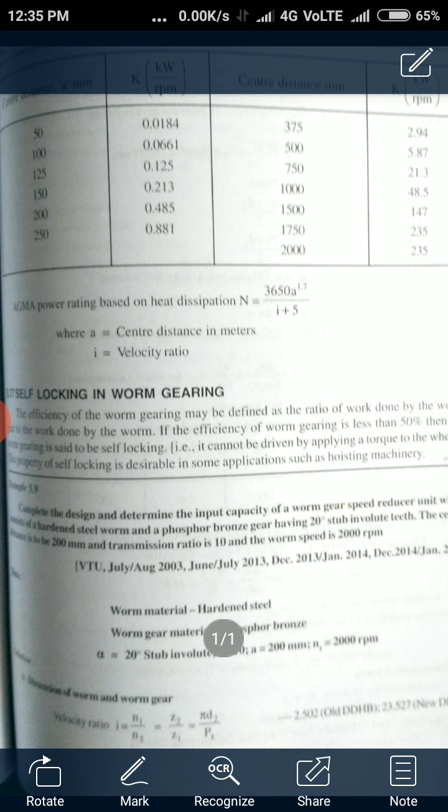Complete the design and determine the input capacity of worm gear, that is a follower worm gear speed reducer unit, which is made of hardened steel. The material for a worm gear, the follower, made of hardened steel worm and phosphor bronze gear having 20-degree stub involute teeth. The center distance is to be 200 mm and the transmission ratio is 10, and the worm speed is 2000 rpm.

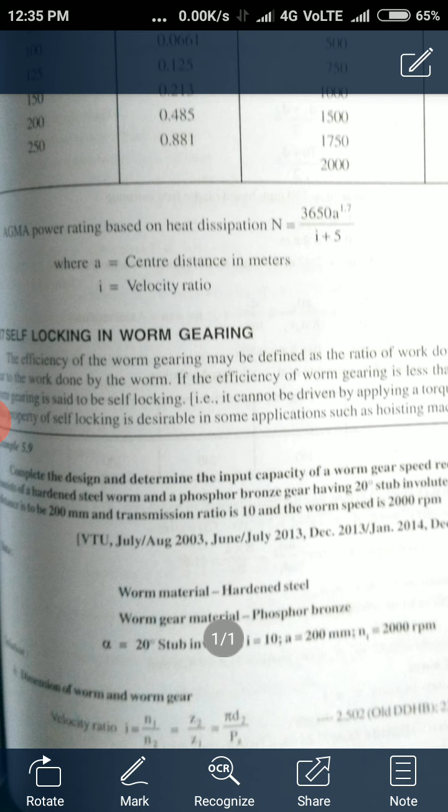So what is given in the data? The material for worm is hardened steel. The material for worm gear is phosphor bronze. Pressure angle is 20-degree stub involute.

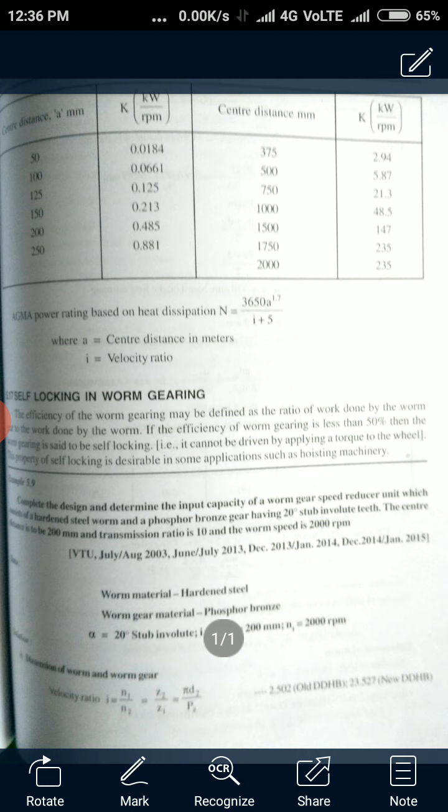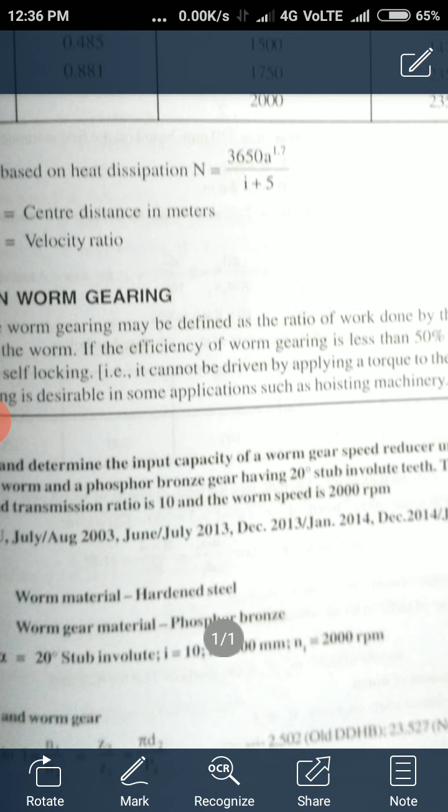The velocity ratio or gear ratio is 10. The center distance A is 200 mm, and the speed of the worm gear is N2. The worm speed, N1, is given as 2000 rpm.

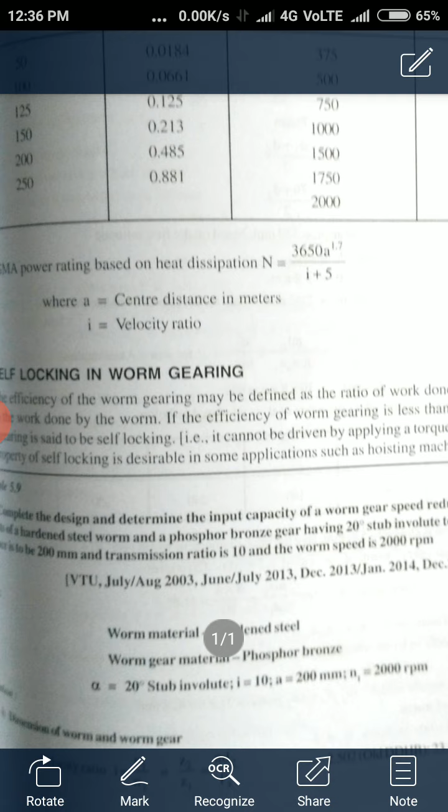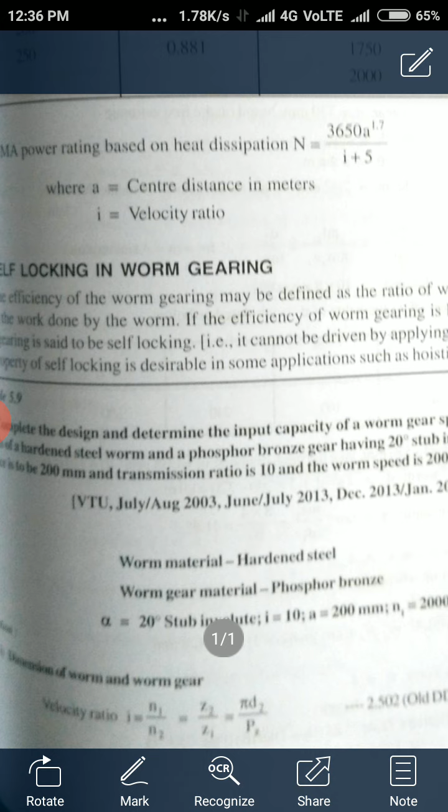Following the same procedure as for design of spur gear, we'll determine the speed of the worm and worm gear. We know the speed of the worm, so we can determine the speed of the worm gear using the velocity ratio, from the equation 23.527: I equal to N1 by N2, that is equal to Z2 by Z1.

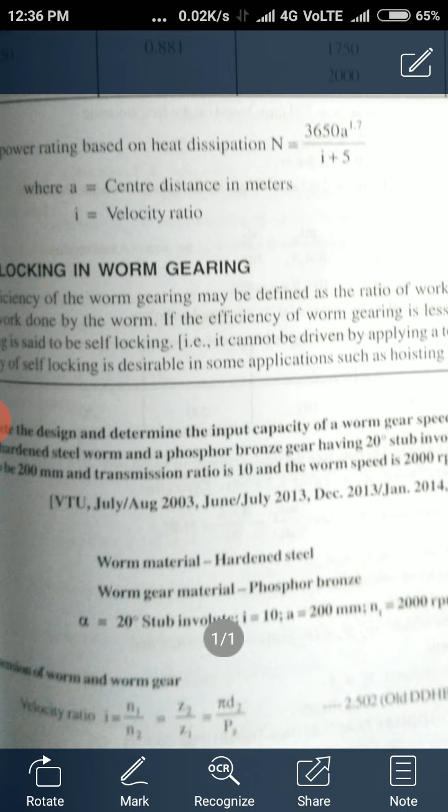Substituting the N1 value, we can determine the speed of the worm gear or the follower. We get N2 equal to N1 by I, that is 2000 by 10, which is 200 rpm. Now step 2.

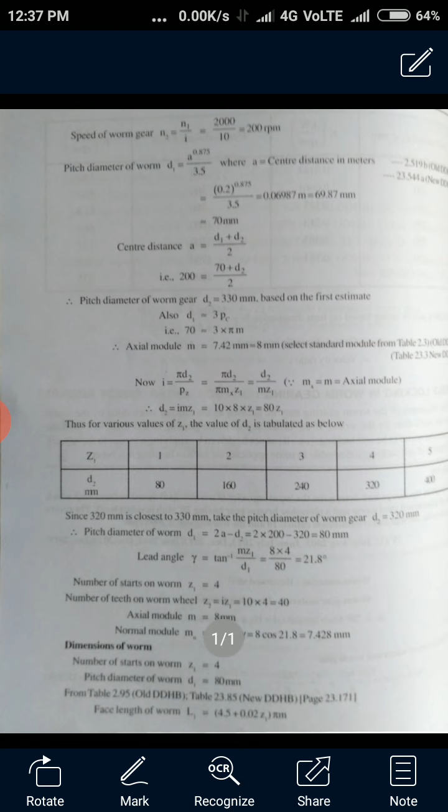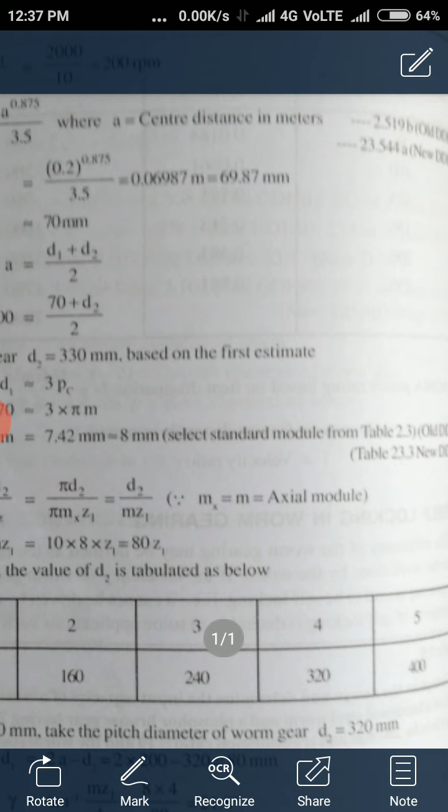In step 2 we will determine the diameters of worm and worm gear by trial basis. The diameter of worm D1 is given by equation 23.544a, which is D1 equal to A raised to 0.875 divided by 3.5, where A is the center distance in meters.

Substitute the center distance given in mm as 200 mm. In meters, that is 0.2 meter. So 0.2 raised to 0.875 divided by 3.5. We get 0.06987 meter, that is 69.87 mm in terms of mm. Rounding off, we can take 70 mm.

Using the center distance, we can determine the diameter of the worm gear, the follower. That is A equal to D1 plus D2 divided by 2. Substituting, 200 equals D1, which is 70 mm, plus D2, divided by 2. We get the diameter of worm gear as 330 mm.

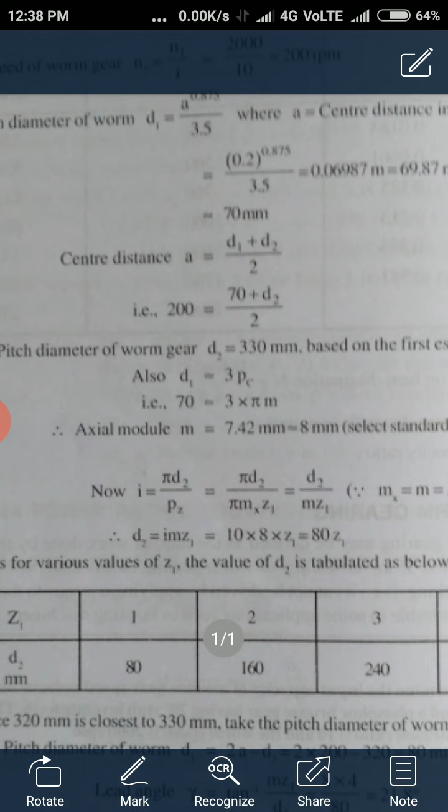As I said, the diameters D1 and D2 will be determined by trial basis here. So take D2 equal to 330 mm. That is D1, D2 based on the first trial.

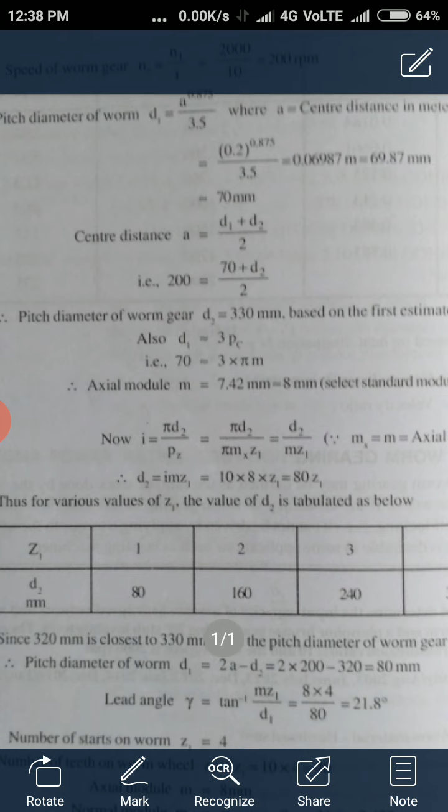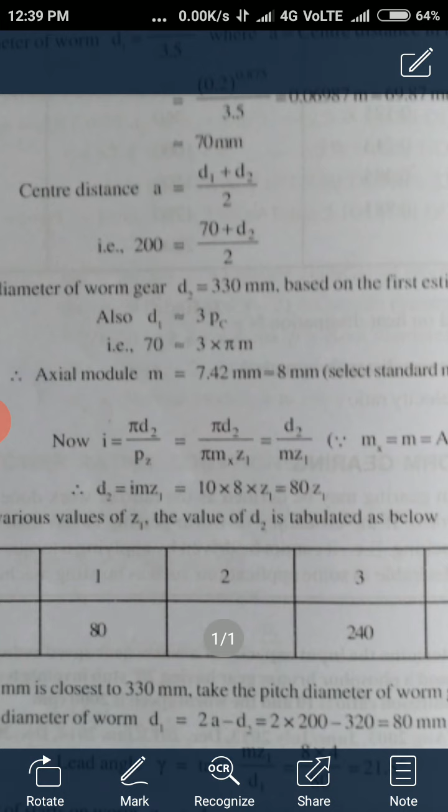Next, in trial 2, diameter of worm is also given by the relation D1 equal to 3 into pc, where pc is circular pitch. Substituting the D1 already found, 70 equal to 3 pi into m. The axial module m we get here is 7.42. The standard module from table 23.3 is 8 mm.

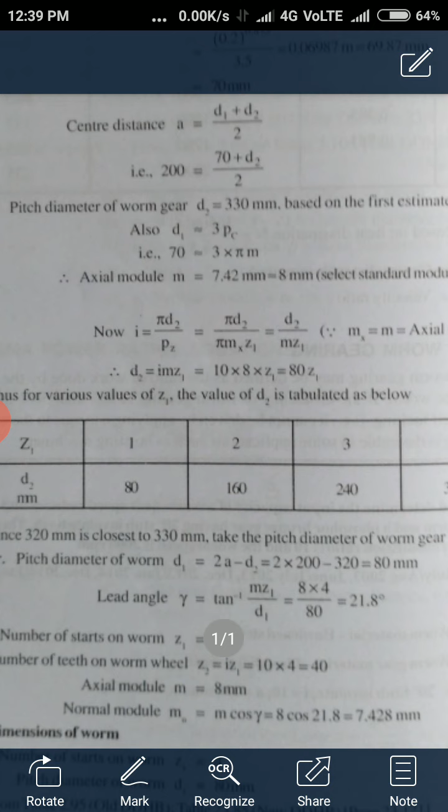Next, one more relation to determine diameter D2, that is I equal to D2 by m into Z1. See the last relation, okay?

Or you can say I equal to pi d2 by pz, that is equal to pi d2 by pi m z1, that is equal to d2 by m z1. Just remember I equal to d2 by m z1. So d2 we can write in terms of I, m, z1.

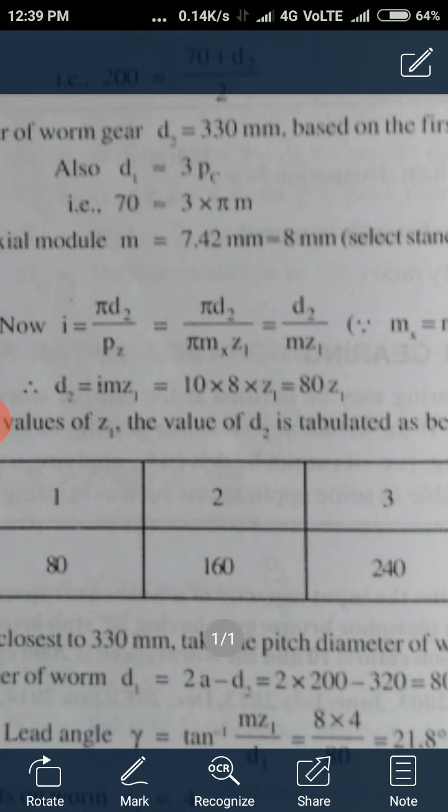Substitute there I value 10, m equal to 8, z1 we don't know, keep z1 as it is. So we have got 80 z1. Now using this table we can determine the diameters for various values of z1.

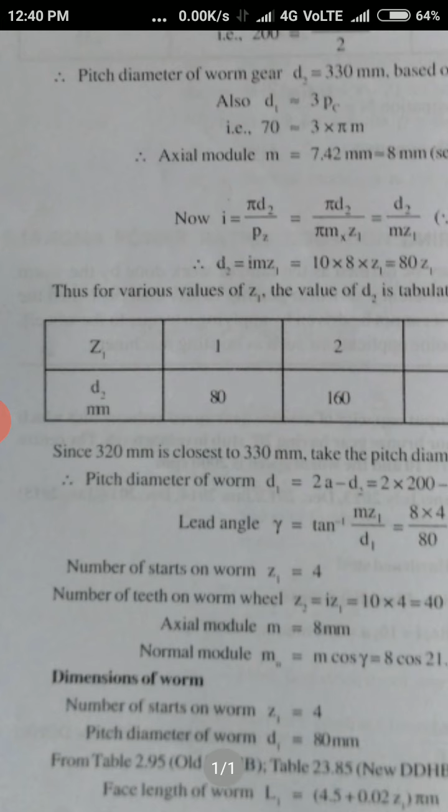So in the first column, first row it is z1, second row it is d2. As I said, the number of teeth on pinion or worm varied from 1 to 4 - so 1, 2, 3, 4. You can take it up to 5.

So using z1 equal to 1 and substituting in the above relation, d2 equal to 80 z1. So determine different values of d2: when z1 equal to 1, d2 is 80; when it is 2, 160; when it is 3, 240; when it is 4, 320; when it is 5, 400.

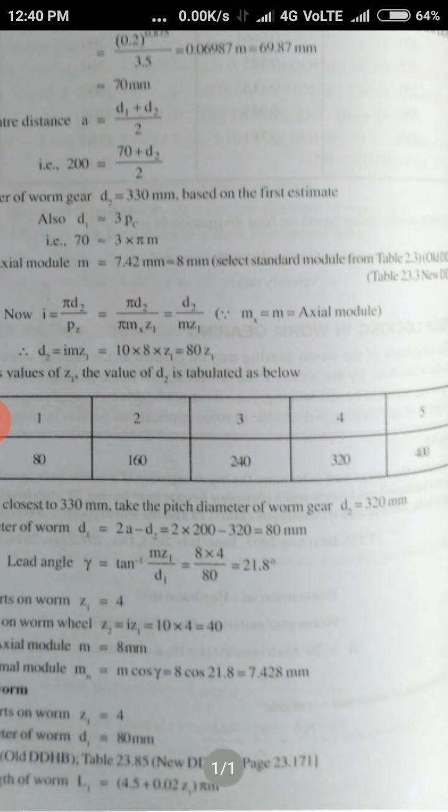Now we have to check the diameter value d2 to the nearest value we determined, 330 mm, based on the first trial. So d2 we got earlier in the first estimation was 330. In the second estimation, you have to see which value is nearest to this - that is 320.

When z1 equal to 4, d2 equal to 320. When z1 equal to 5, you got 400. Compared to 400, 320 is nearest to 330. So we can select d2 equal to 320, z1 equal to 4.

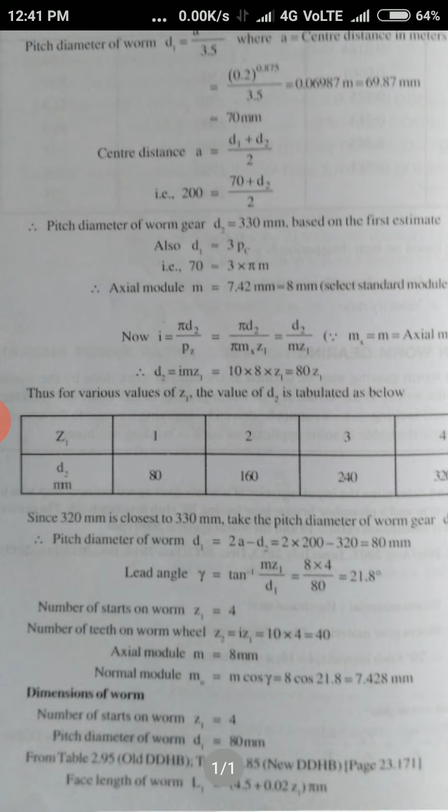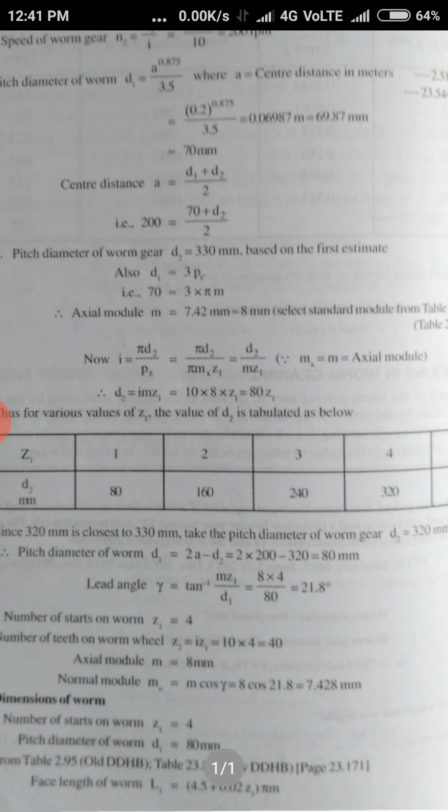Then we'll determine the correct number of teeth on pinion or worm, and also the correct diameter d1, using the center distance. So d1 equal to 2a minus d2, which gives 80 mm as d1.

Here you can see number of starts, meaning number of teeth on worm, z1 equal to 4, corresponding to 320. z2 using speed ratio I into z1, 10 into 4, gives 40. The axial module you got is 8 mm.

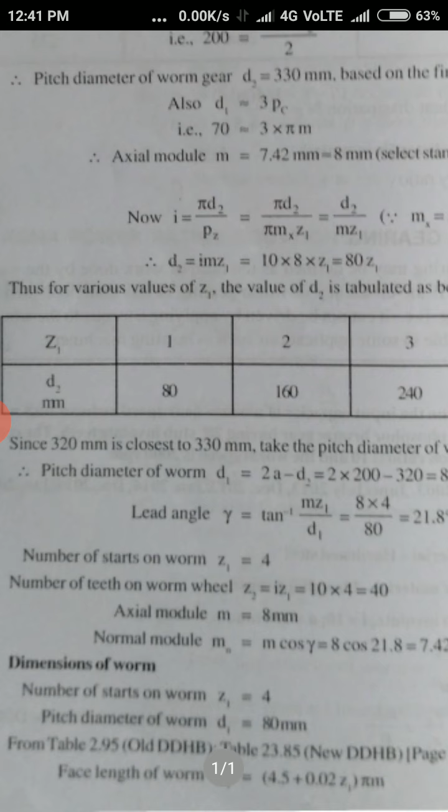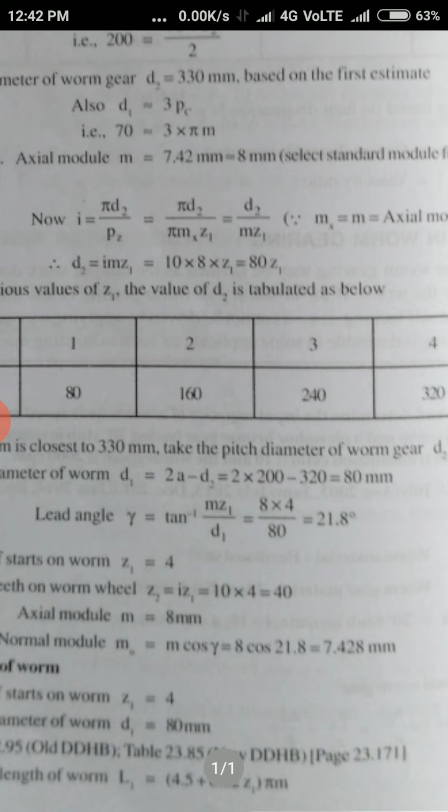One more term to determine is the lead angle, needed when you calculate efficiency in the later stage. That is lead angle equal to tan inverse of m z1 by d1. This formula is not in the data handbook, you have to remember this. So tan inverse of m z1 by d1: m is 8, z1 is 4, d1 is 80. So how much angle do you get? 21.8 degrees. Now moving to step number 3.

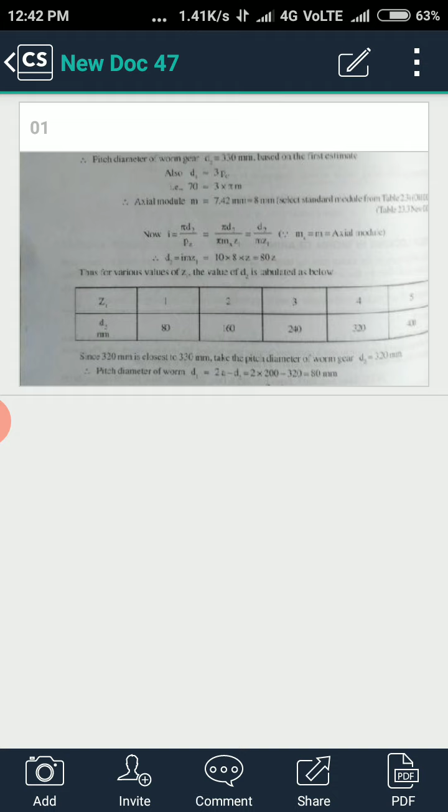Moving to step number 3. One thing you have to remember always here, when you determine the weaker member - when you design worm gears, always the worm gear is the weaker member compared to the worm. So by default worm gear is the weaker member.

So now we'll determine the power by Lewis equation, given by equation 23.567: ft2 equal to sigma 0 into mn into b into capital Y into cv. So sigma 0 is allowable stress, mn is normal module, b is face width, capital Y equal to, already discussed in bevel gear, pi into y, and cv is velocity factor.

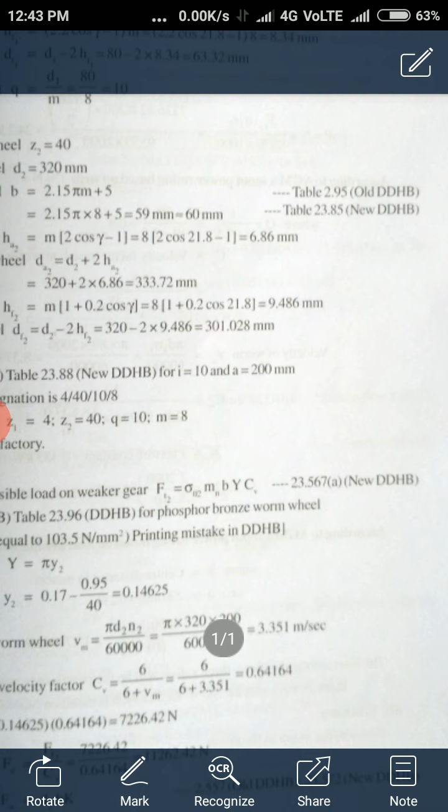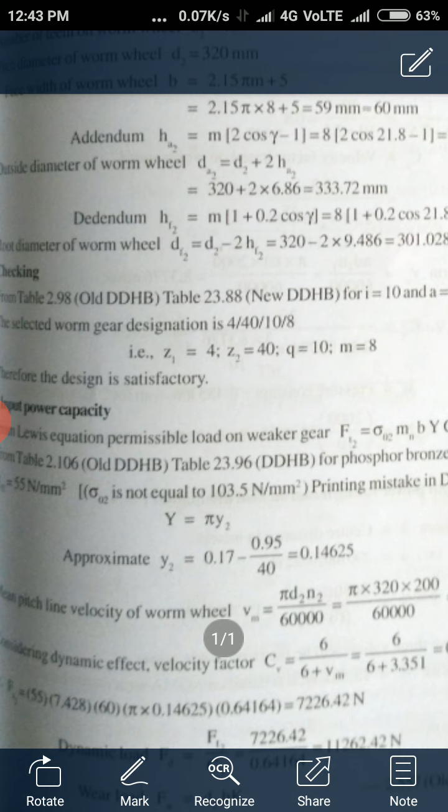The table for worm gear to determine the allowable stress is 23.96. For phosphor bronze worm wheel, we get sigma 0 equal to 55 Newton per mm square. But in the data handbook it is given as 103.5 Newton per mm square - that is not correct. The correct one is 55 MPa. So just note this down and try to remember, don't take the data handbook value which appears as 103.5 MPa.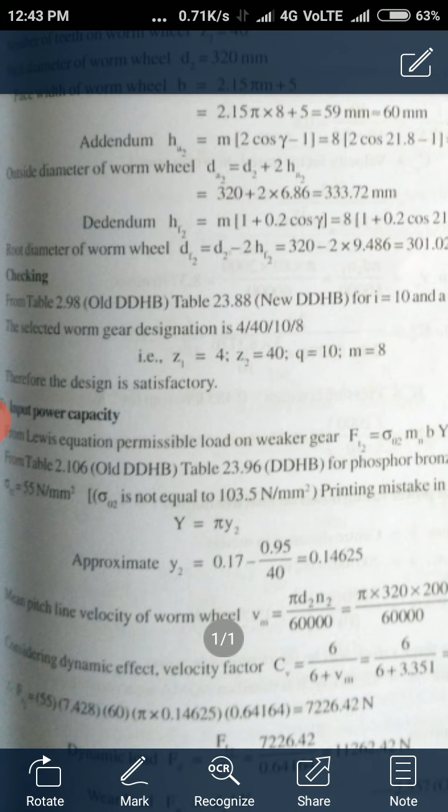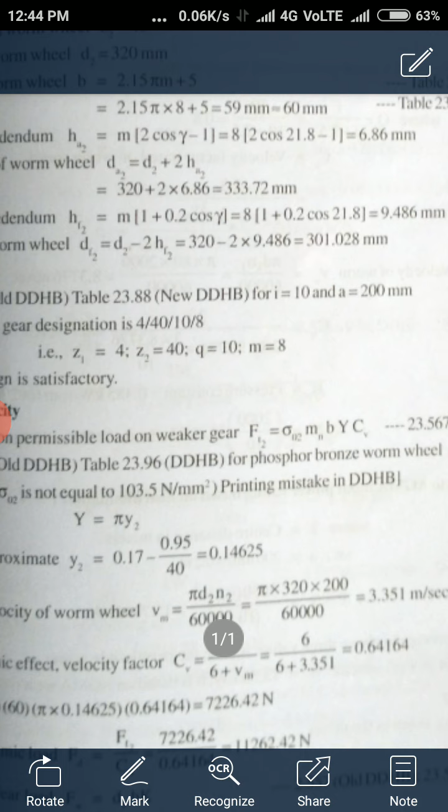Next, mn is normal module, we know that. B is face width, you have to assume as 10 m. Capital Y equal to pi into y2, pressure, Lewis form factor for 20 degree stub involute. So using the equation, 0.17 minus 0.95 by 40, that's equal to 0.14625.

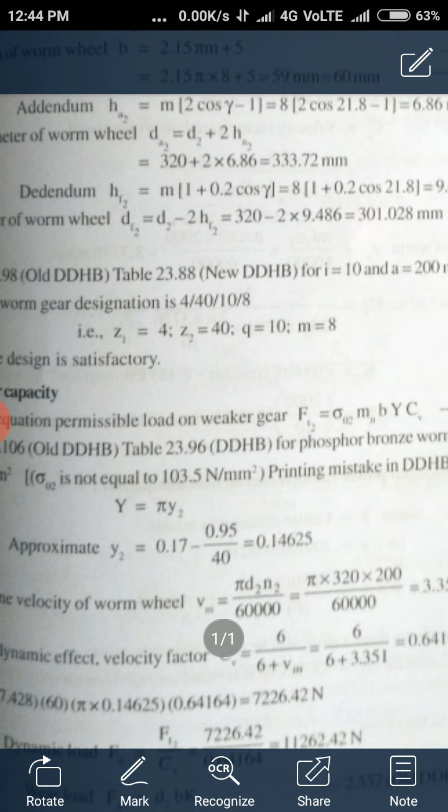Cv is velocity factor. Before that we'll determine the velocity of the weaker member: pi d2 n2 divided by 60,000. So pi d2 you know is 320 mm, n2 is 200 rpm.

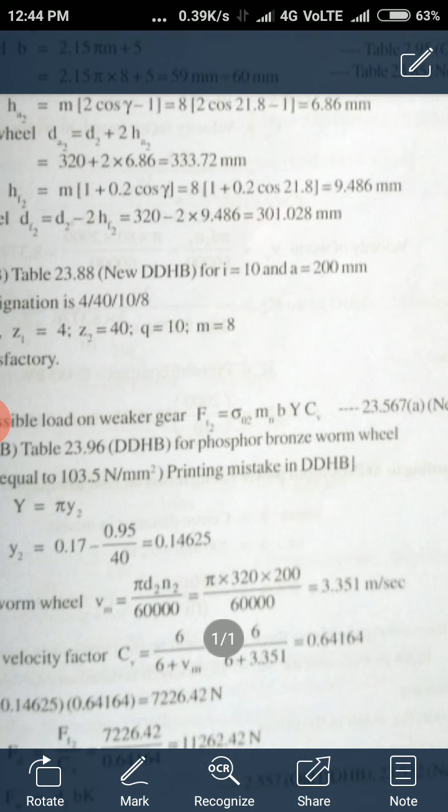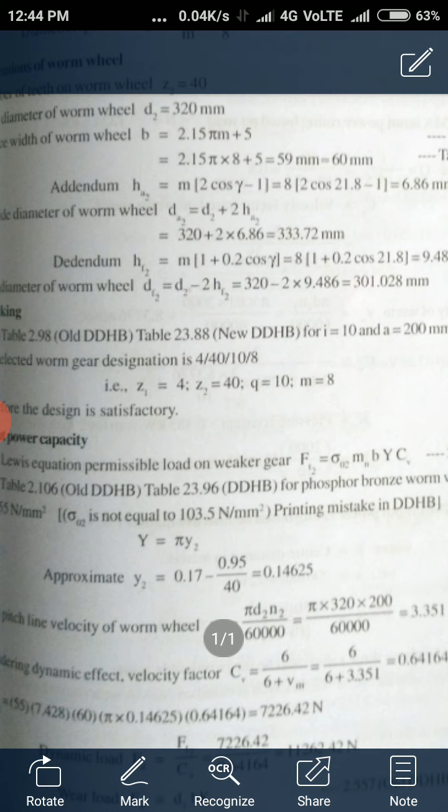So we got 3.35 meter per second. The velocity factor Cv equals 6 by 6 plus Vm. You have to remember this for a worm gear, you have to use only this equation. So 6 by 6 plus Vm is 3.35, so we got 0.64 as Cv.

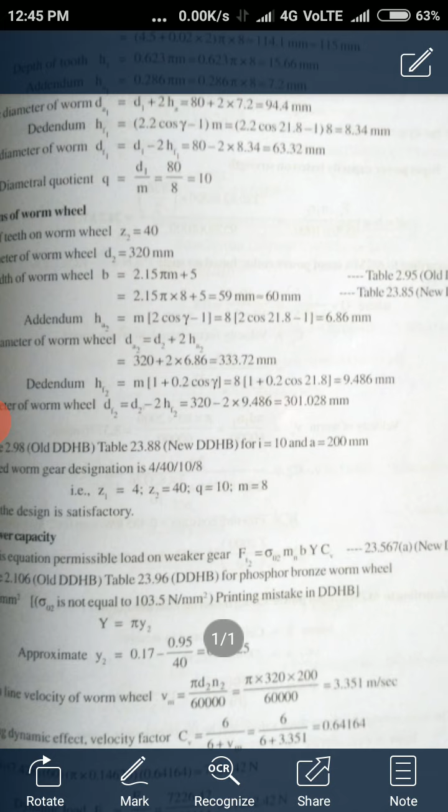Substituting all the values in the tangential tooth load by Lewis equation. That is 55 allowable stress, M is normal module 7.42 or 8mm also you can substitute, 60 is the face width... face width is not 10mm, sorry. Here the face width B can be determined from the above table, you see here.

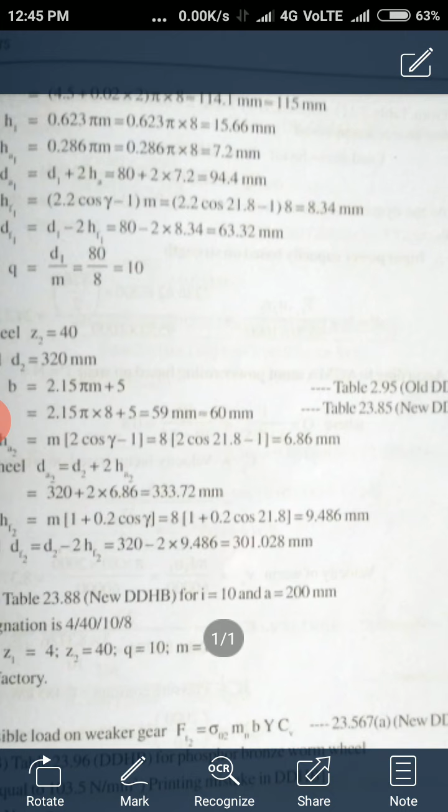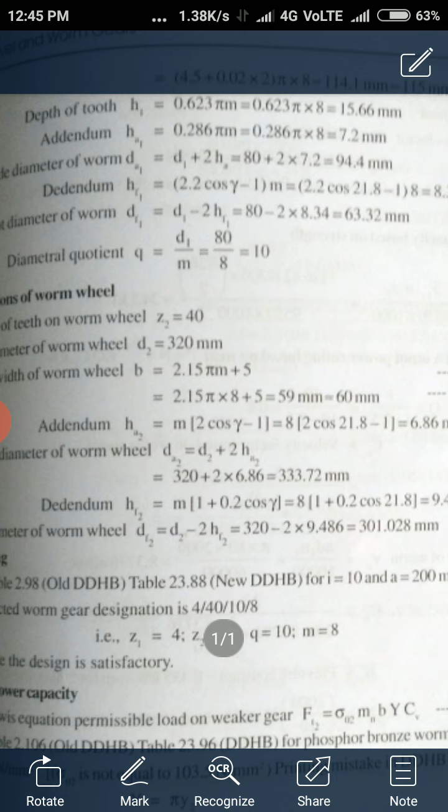Face width of a worm wheel B equals 2.15 pi m plus 5, from the table 23.85. So 2.15 pi into 8 plus 5, so you got 59mm, round off to 60mm. So 60, the face width, substitute the same in the tangential tooth load by Lewis equation.

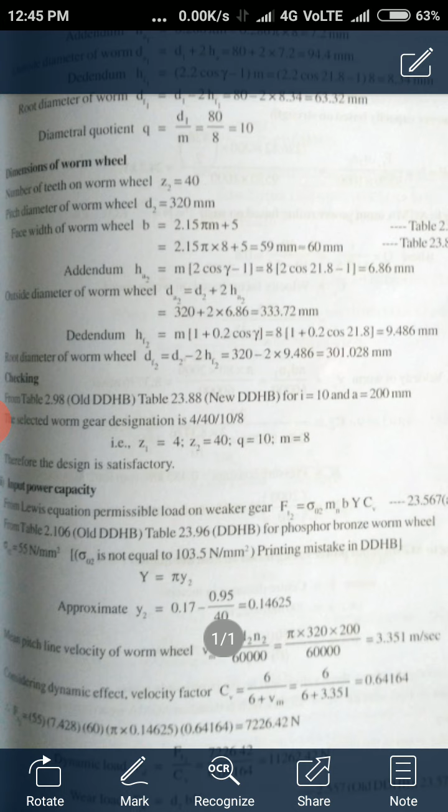60 into pi y2, y2 is 0.1462, into Cv velocity factor 0.64. How much you got? 7226.42 Newton. Then next step, dynamic load.

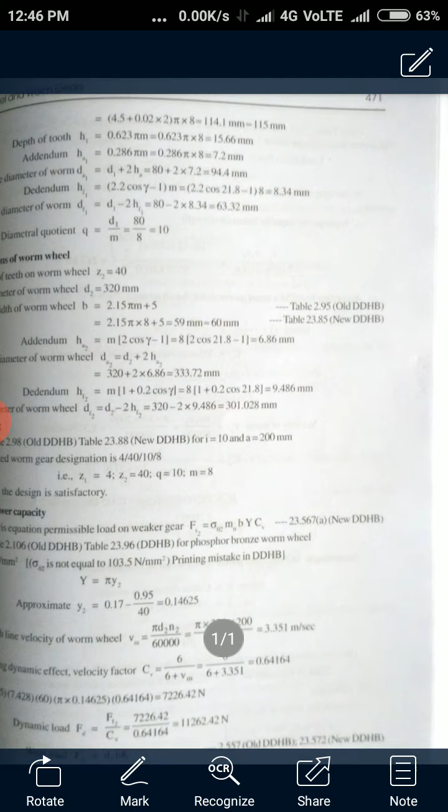It is given by Ft2 by Cv. You have to remember these relations because they are not in the data handbook. So Fd equals Ft2 by Cv, so 7226.42 by 0.64, so you got 11,262.42 Newton. Then wear load Fw equals d2 b k, from the equation 23.572.

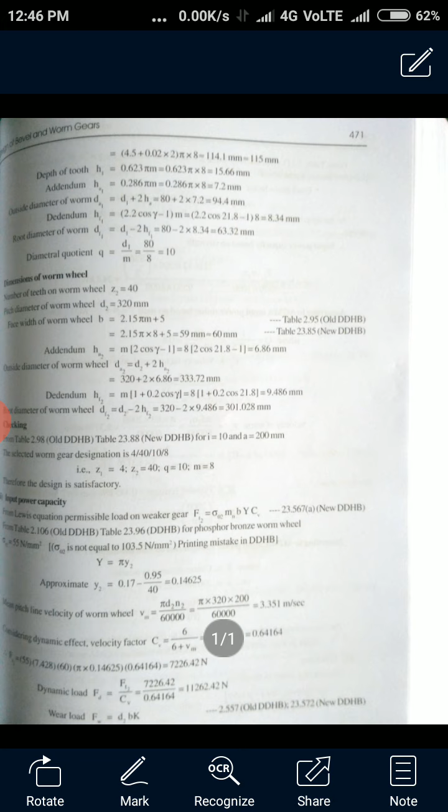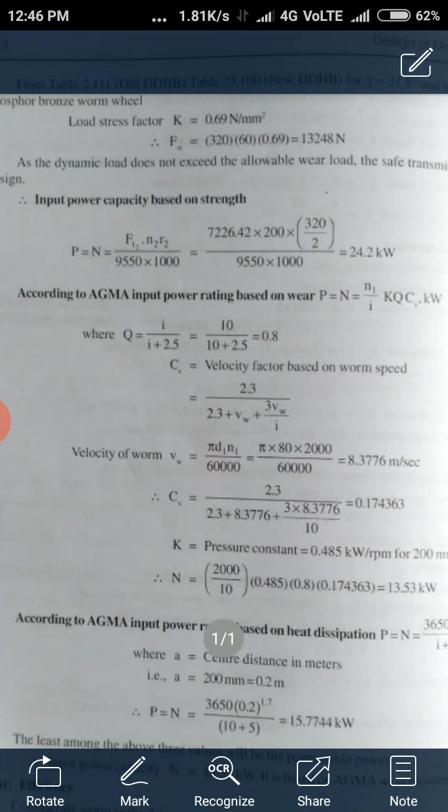So now here K is what, the load stress factor. So how we can determine the K value? Going to the table.

23.100 for lead angle, so lead angle we can calculate from here. So here you can see the lead angle formula, tan inverse of mz1 by d1. So 8 into 4 divided by 80, so you got 21.8 degree.

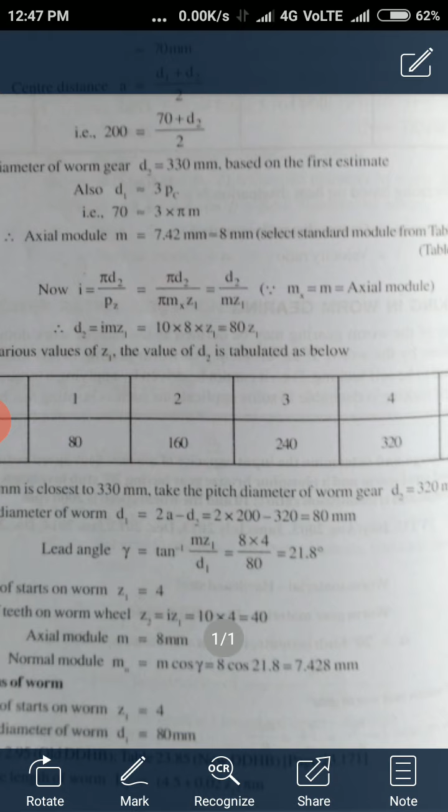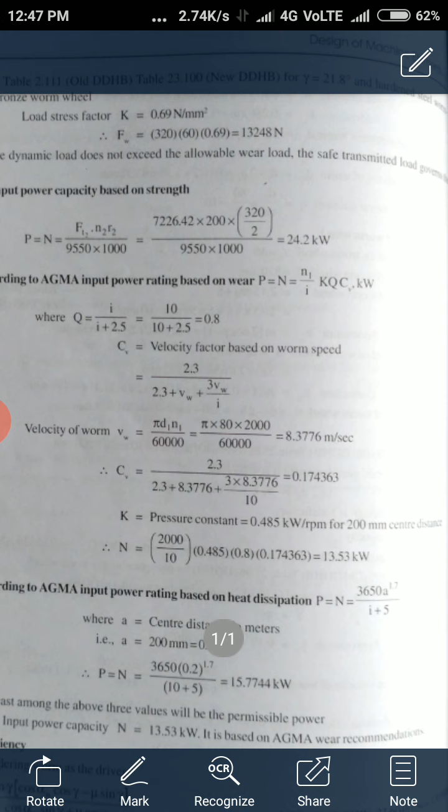So based on that, going to the table 23.100, for angle 21.8, for hardened steel worm and phosphor bronze worm wheel, so K value equals 0.69.

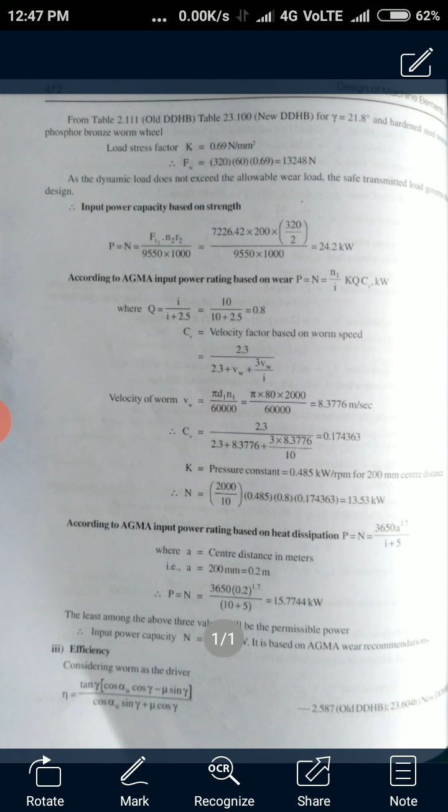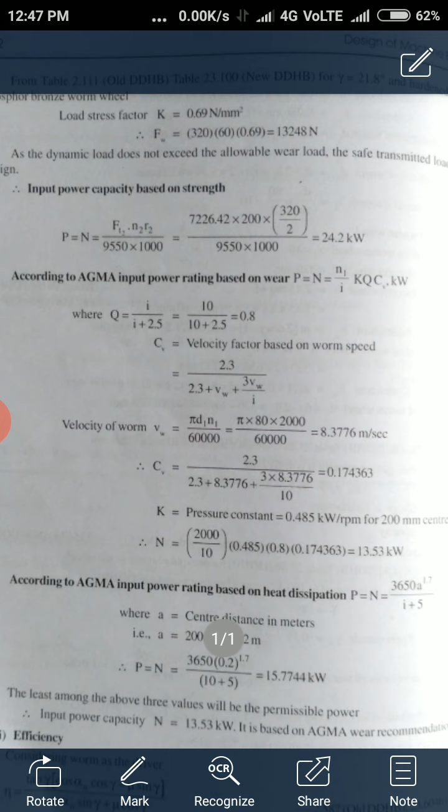So substitute the wear load equation, 320, d2 60, the face width, K is 0.69. You got 13,248 Newton. So you can see the dynamic load is lesser than the allowable, does not exceed the allowable wear load. The design is safe.

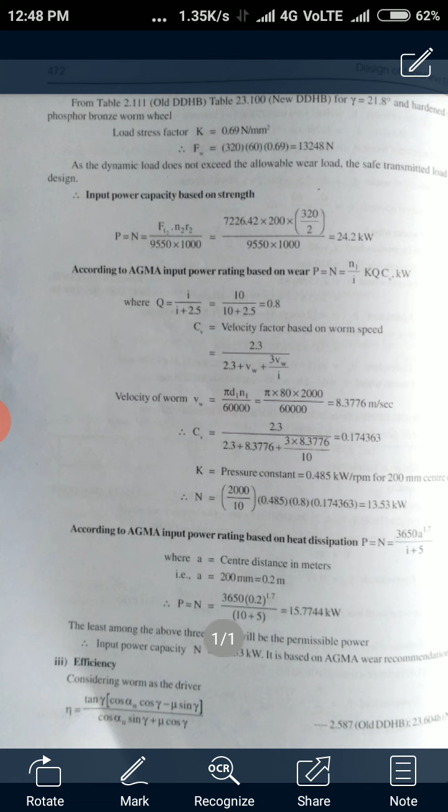Next step, so we determine the power based on 3 or 4 different criteria here. So the power based on the tangential tooth load, the power based on power rating, and the power based on heat dissipation. So three different powers we have to calculate, and among that the least power should be selected.

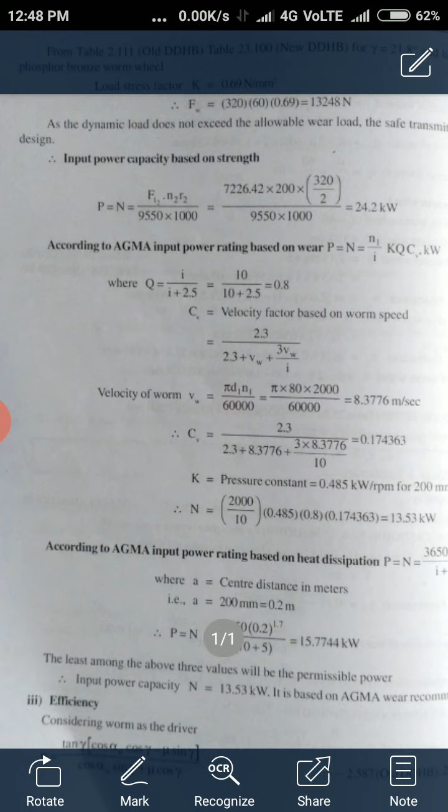So first one, power based on tangential tooth load. Already we know that when you design gears, ft equals 9550 by n r. So rewriting that, for a worm gear, n equals ft2 n2 r2 divided by 9550 into 1000. Ft2 already calculated, so substitute using that, we got 24.2 kilowatt.

Next, the power based on wear, so that is given by N equals N1 by I, K Q CV kilowatt. So these are the formulas not in the data book, these we have to by heart or remember. So where Q equals I by I plus 2.5. So I equals 10, velocity ratio 10 plus 2.5, so that is 0.8.

CV velocity factor based on worm speed. So worm velocity of the worm is given, pinion, worm is a pinion, so it is given by pi d1 n1 divided by 60,000. So that's equal to pi 80 into 2000 divided by 60,000, you got 8.37 meter per second.

So substitute that in CV, that is 2.3 divided by 2.3 plus VW, speed of the worm, plus 3 VW divided by I. So CV equals 2.3 divided by 2.3 plus 8.37, plus 3 into 8.37 divided by 10, so you got 0.1743. Then next K value, that is pressure constant.

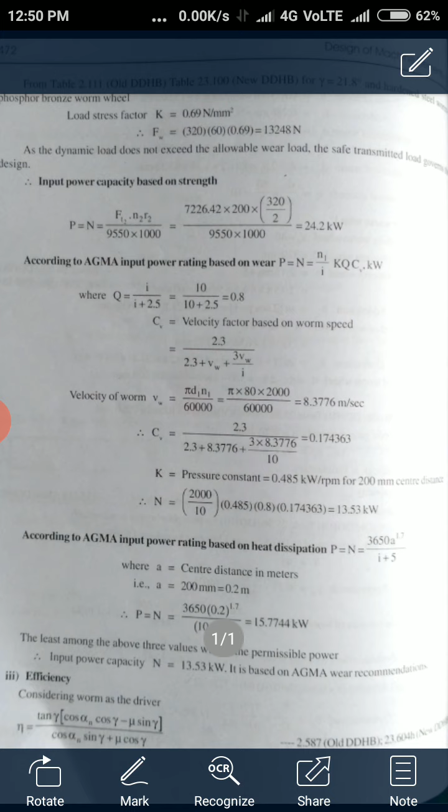So for 200mm center distance, you have to remember again this value, 0.485 kilowatt per rpm. Substitute these values in the power equation. N equals N1 by I, that is 2000 by 10, K 0.485, Q 0.8, CV 0.17, so you got 13.53 kilowatt. Next, the power based on heat dissipation.

So that is P equals N equals 3650 A raised to 1.7 divided by I plus 5. A should be in meters, so 200mm, that is 0.2 meter.

So 3650 into 0.2 raised to 1.7 divided by 10 plus 5. So you got 15.77 kilowatt.

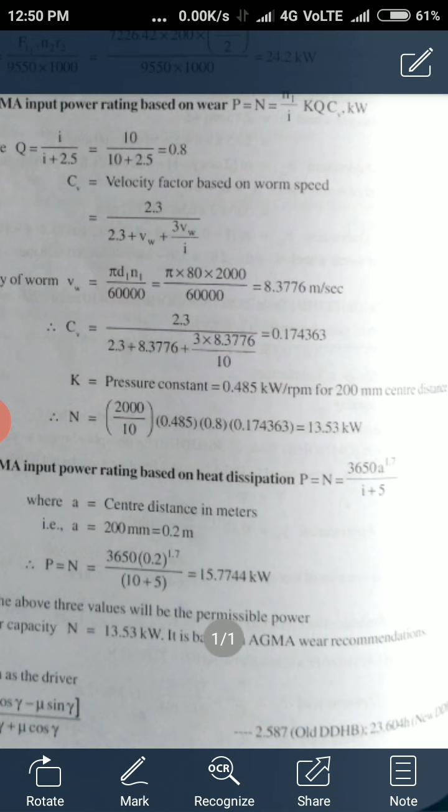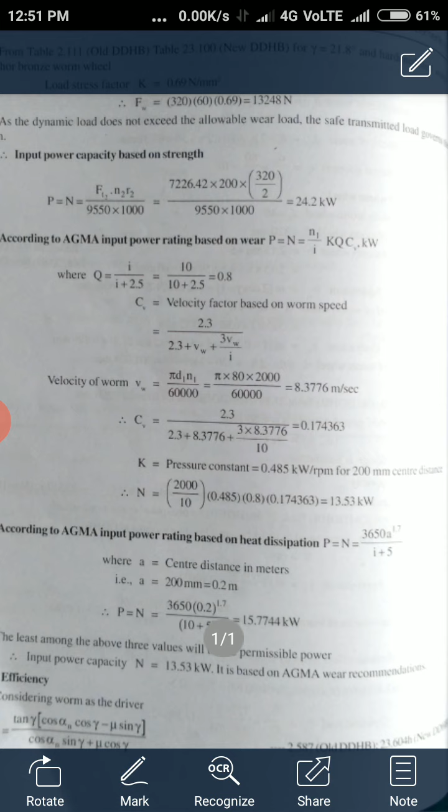Comparing all these: based on strength 24.2, based on wear it is 13.53, and based on heat dissipation it is 15.77. So the least one is 13.53 based on wear, so that should be selected for the design.

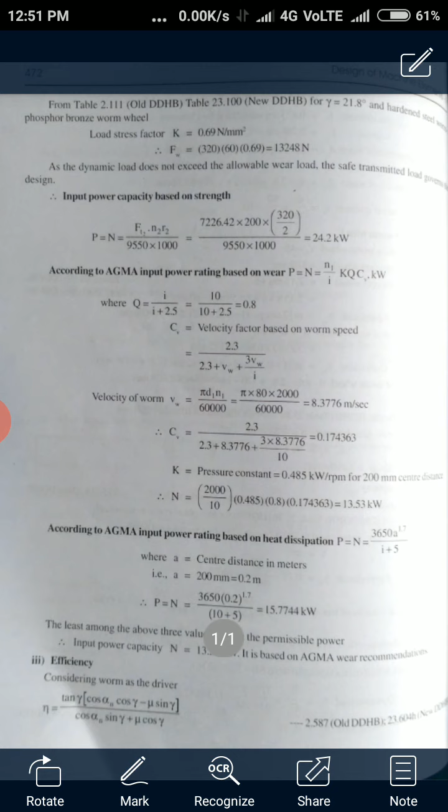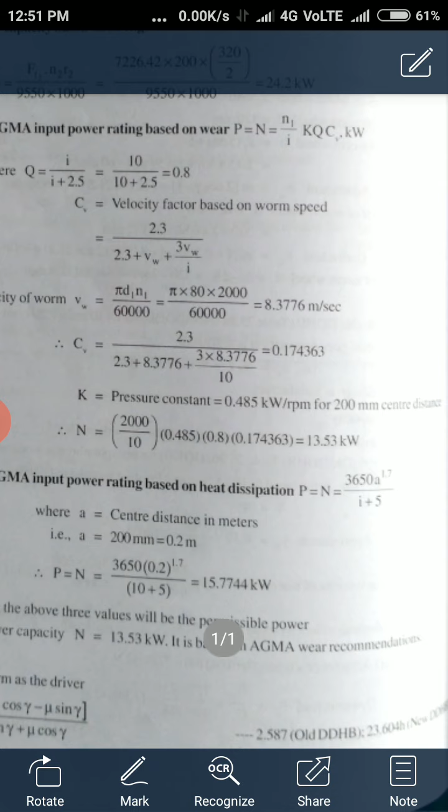Next, efficiency. Efficiency is given by the formula. This is one equation we have here, 23.604h. So one more equation is there that we can use, that one is you can see here.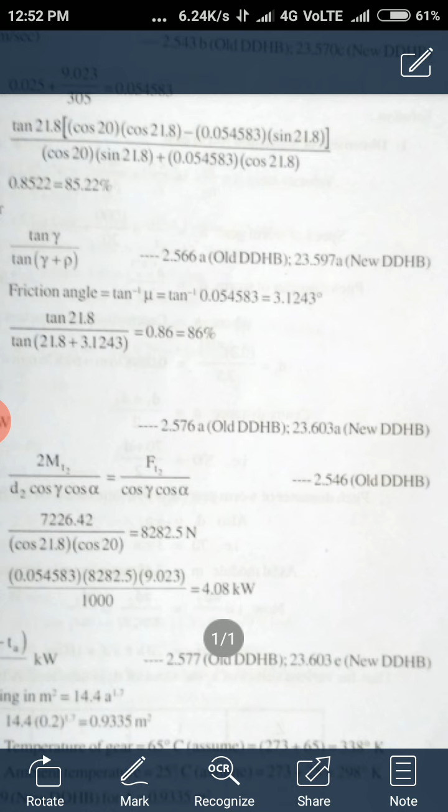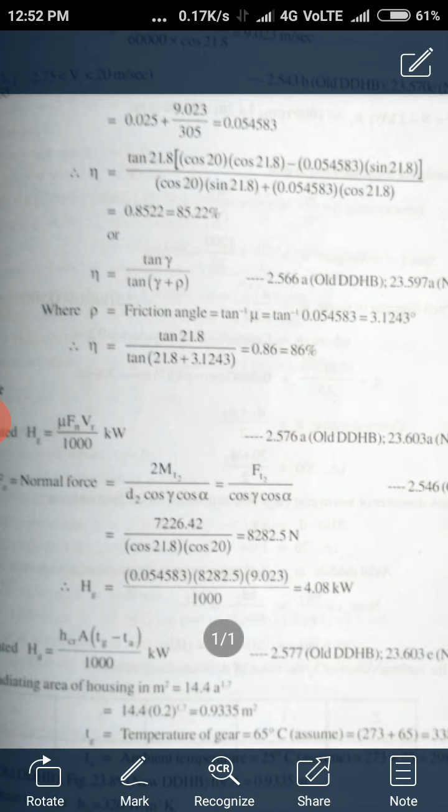You can see here the efficiency is equal to the equation 23.597a, that is efficiency equal to tan gamma divided by tan gamma plus rho, where rho is the friction angle, given by tan inverse of mu. So mu is the friction coefficient. How to calculate friction coefficient mu, you can see here.

That is based on the rubbing velocity, which is based again on the worm speed, given by equation 23.571a. That is equal to pi d1 n1 divided by 60,000 cos gamma. Substitute that: pi 80 2000 divided by 60,000 cos gamma, that is lead angle 21.8. So you got 9.023 meter per second.

This velocity is less than 20 meter per second, so the friction is given by equation 23.570c. That is 0.025 plus rubbing velocity Vr divided by 305. So how much you got here: mu equal to 0.025 plus 9.023 divided by 305. So you got 0.0545.

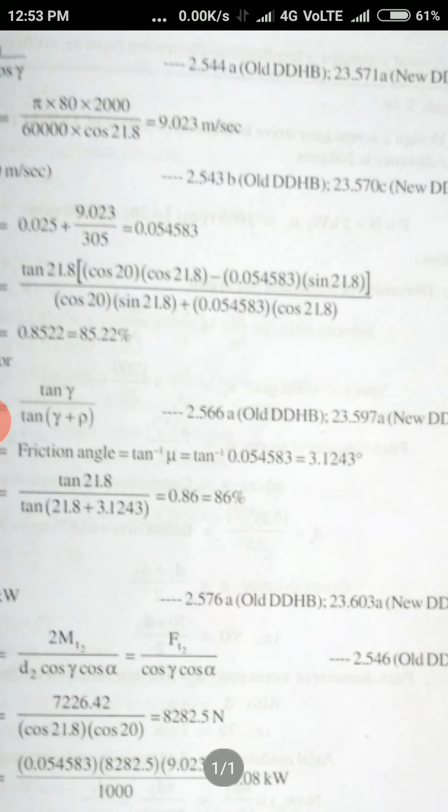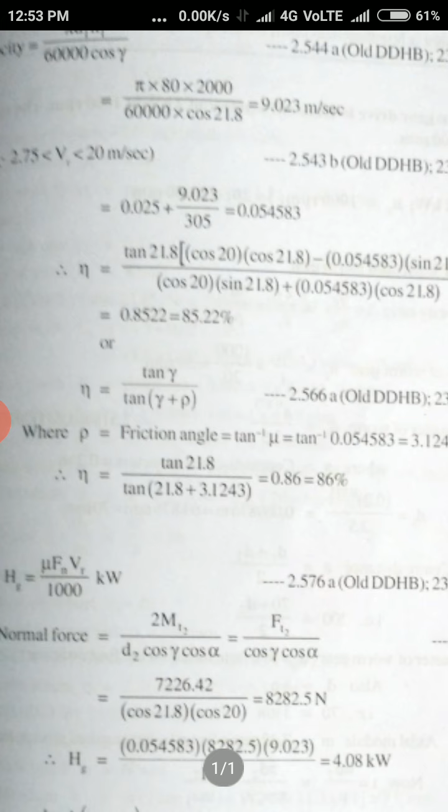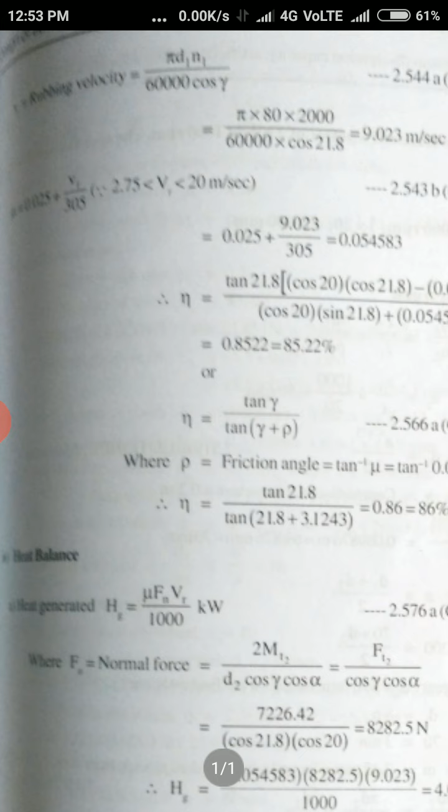Substitute here in the efficiency equation 23.597a. So efficiency equal to tan of 21.8 divided by tan of 21.8 plus 3.12, that is the friction angle. So how much efficiency got? 86%.

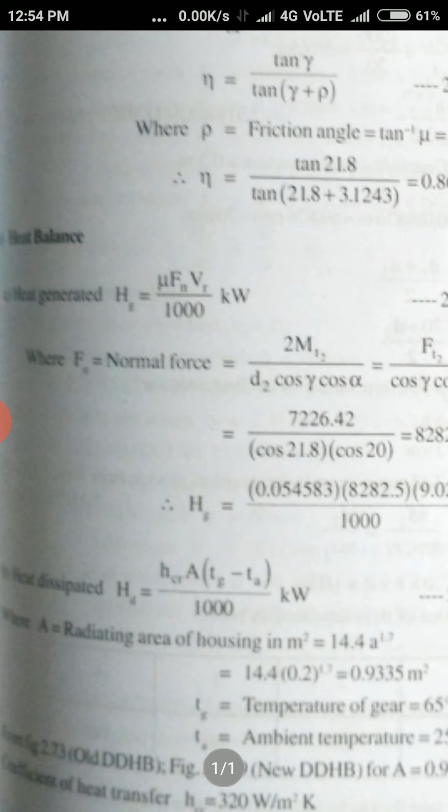Now last two parameters, heat generated and heat dissipated. The heat generated is given by Hg equal to mu Fn Vr by 1000. Here Fn is the normal force. Again these equations are in DDHB, you have to remember.

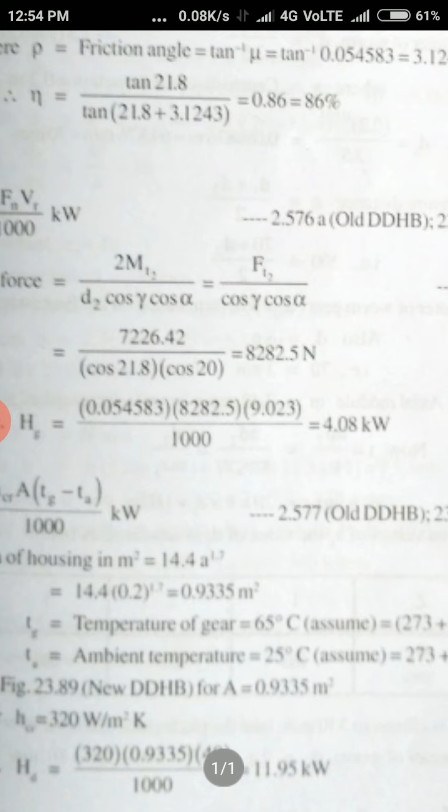Fn equal to Ft2 divided by cos gamma cos alpha. Substituting that: 7226.42 divided by cos gamma 21.8, cos alpha 20 degrees. So you got 8282. Heat generated equation is 23.603a: mu Fn Vr by 1000. So mu 0.05, Fn 8282.5, Vr 9.02 divided by 1000. So you got 4.08 kilowatt heat generated.

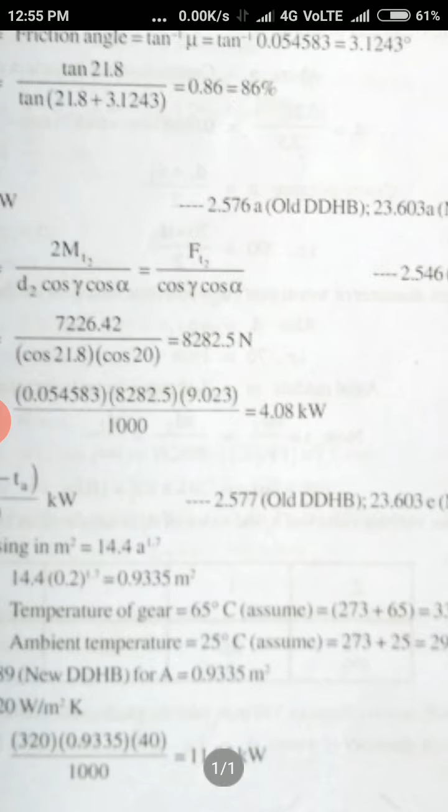Heat dissipated is given by equation 23.603c: Hd equal to hcr A into bracket Tg minus Ta divided by 1000 kilowatt, where A is the radiating area of housing in meter square, given by 14.4 A raised to 1.7, where A is in meter, centre distance. So 14.4, 0.2 raised to 1.7, you got 0.93 meter square. Tg is the temperature of gear, assumed at 65 degrees Celsius.

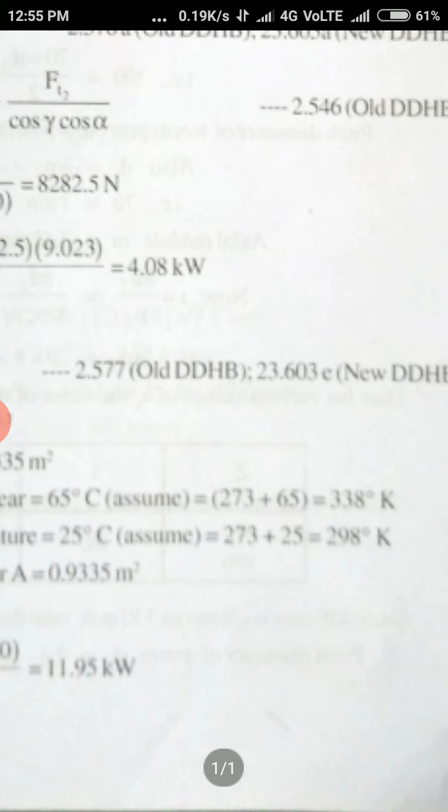Converting into Kelvin: 273 plus 65, 338 degree Kelvin. Then Ta ambient temperature taken as 25 degrees Celsius assumption, so in Kelvin, 273 plus 25, 298 degree Kelvin. And hcr, how to take that? Go to figure 23.89. For A equal to 0.9335 meter square, the coefficient of heat transfer, hcr equal to 320 watt per meter square Kelvin. So now substitute all the values.

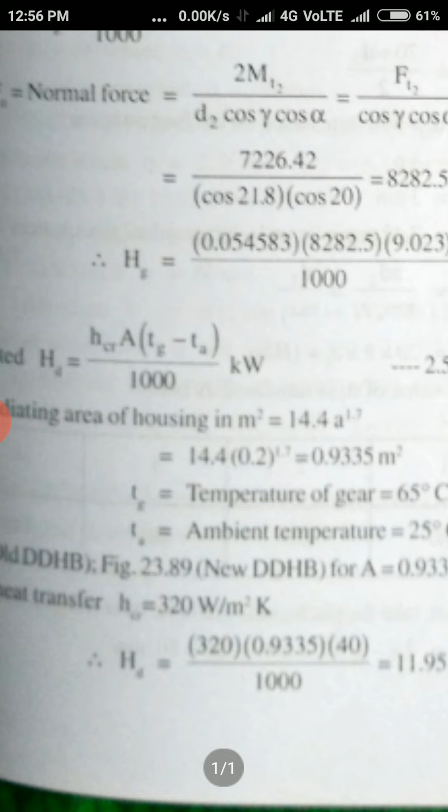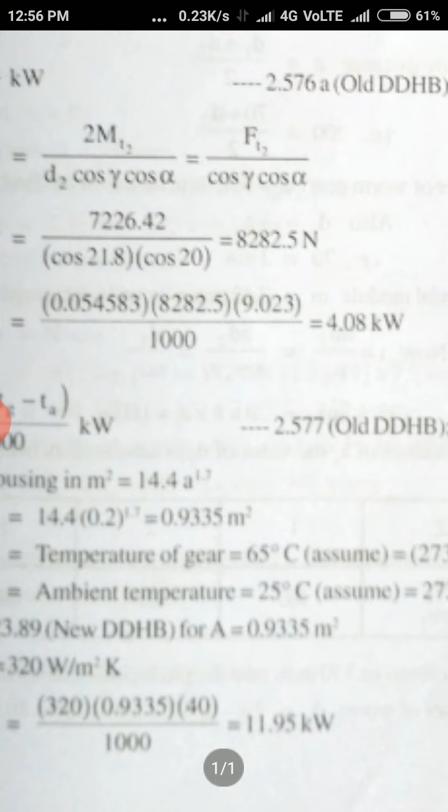320 hcr into A, the radiating area 0.9335, into 40, which is Tg minus Ta, that is 338 minus 298 degree Kelvin, so you got 40, divided by 1000. So you can see 11.95 kilowatt. So heat generated is 4.08, heat dissipated is 11.95, which is more than the heat generated.

So you can say that artificial cooling is not required to avoid excess heat dissipation.

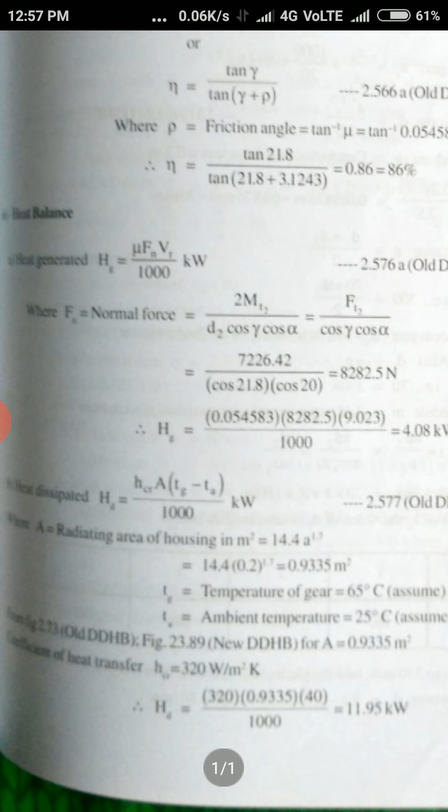So just going through this problem, you can see the procedure for worm gear design is completely different from the other gears. The formulas are different, so some of the formulas you have to remember. This is a 20 marks question, along with the design of clutches and brakes. So try to see this problem, check the data handbook and try to calculate using a calculator. Any doubts, just make a call.